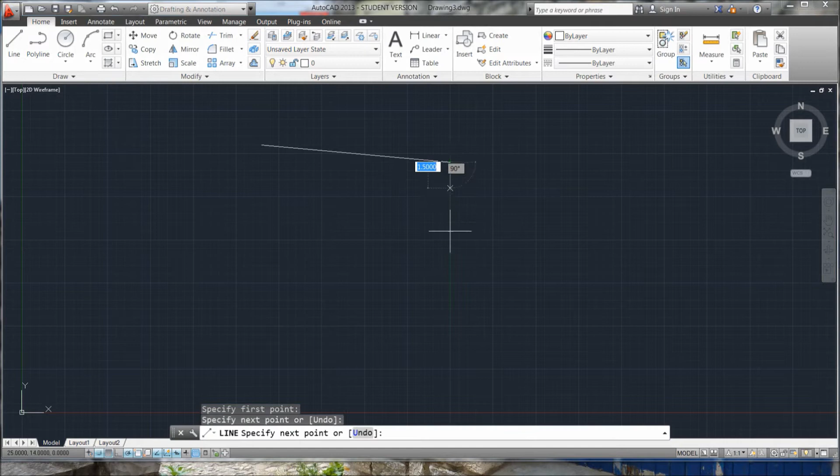The goal of my training is that with each tutorial you can improve your skills in AutoCAD. I want to go step by step and very slowly. Let's start. First, I show you how you can navigate in AutoCAD. I just draw something so you can see how it works. With your mouse wheel, you can zoom in or out. If you press the mouse wheel, you can move to the left, to the right, to the top and to the bottom.

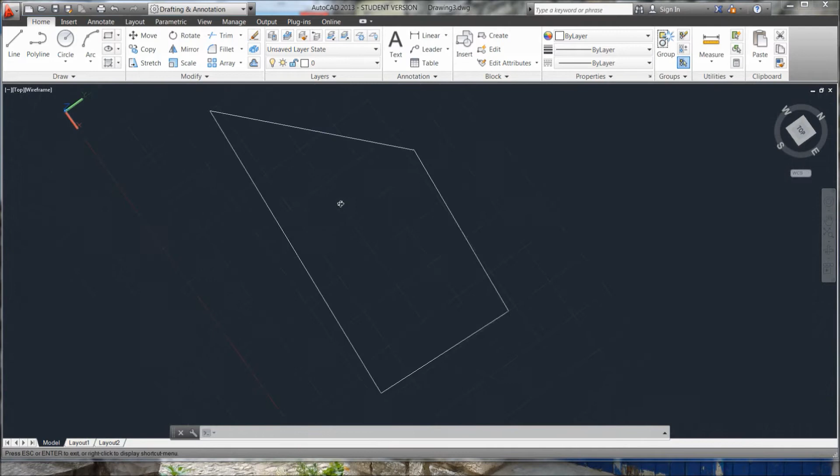If you hold Shift and press your mouse wheel and move your mouse, you can move wherever you want in the drawing. If you are somewhere in the drawing and you don't know where you are and you want to see your whole drawing, you can just double-click on your mouse wheel and you will see the whole drawing.

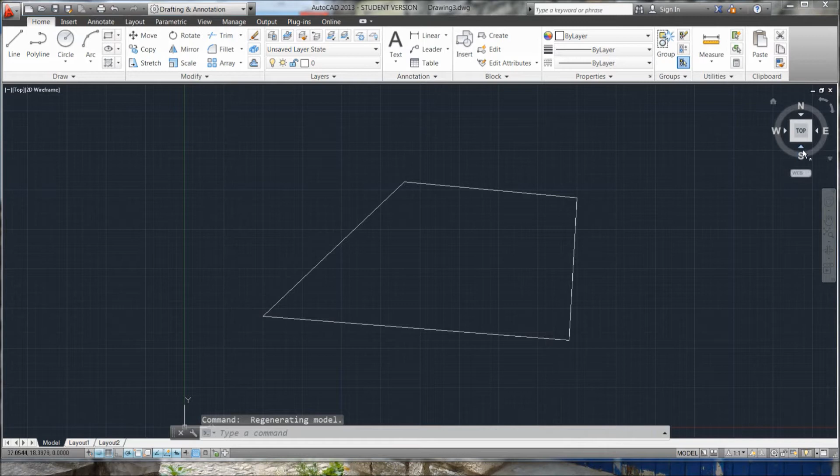On the top right, you have the View Cube. With this cube, you can also navigate in AutoCAD. When I turn, you see that the View Cube also turns with you. It always shows you where you are in your drawing. There's also a compass. You can also click on this. If you want to see your drawing from the top, you click on it. If you want to see your drawing from the front, you can click here. Or from the right side, you can click here. Or if you want to see it half right, half front, you can click between front and right.

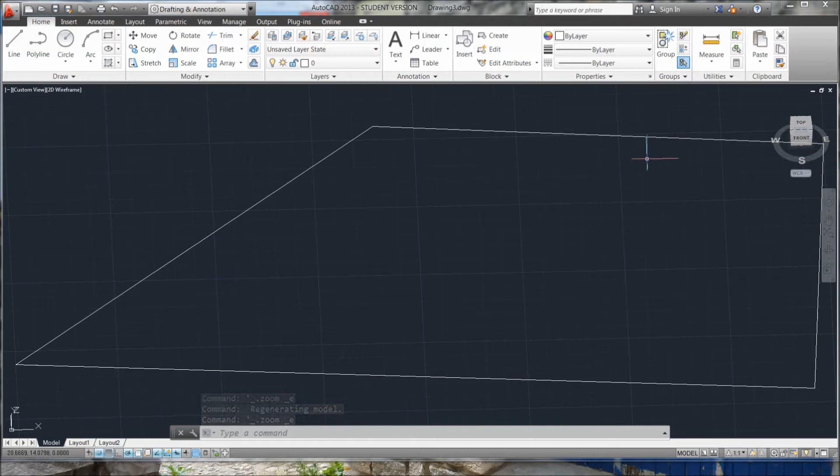One thing more, here you see the house or home symbol. If you have a favorite view, like maybe this, you can click this house symbol and set the current view as home. It means when you now go somewhere here and you want to go back to your favorite view, you can just click on the house symbol and it will go back to the view you set. You also have the possibility to make a perspective view.

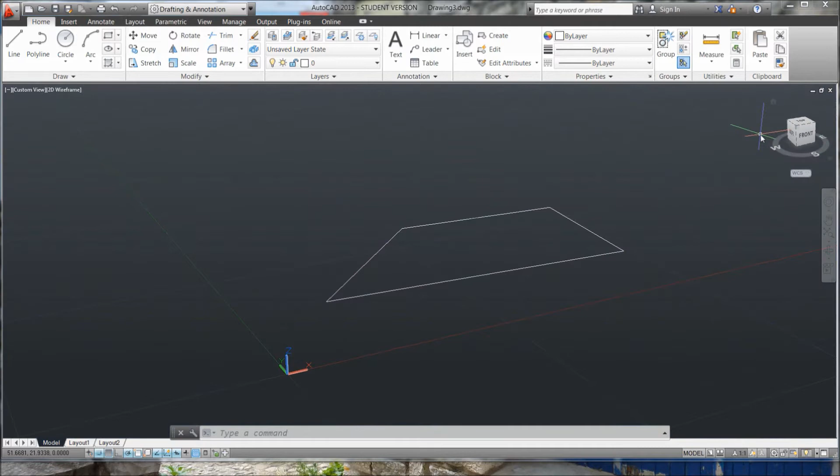Okay, and now I explain the coordinates. On the bottom left, you have the coordinates. You have the X coordinate, you have the Y coordinate, and when you press your mouse wheel and the Shift button, you also see the Z coordinate here. You need the Z coordinate for 3D drawings.

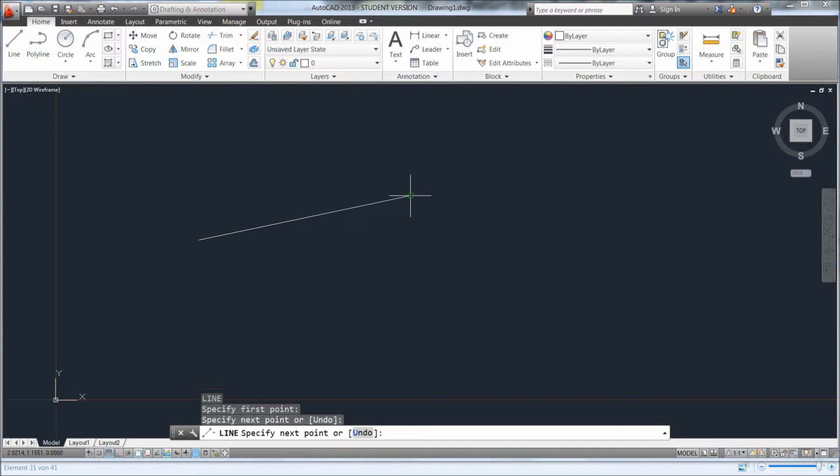Next step, I show you how you can draw a line. You can draw a line by pressing the button L for line and confirming with Enter or Space, and now you're able to draw lines. You can draw them anywhere, it doesn't matter. This is one possibility. Or you can click here on this symbol for line and do the same thing.

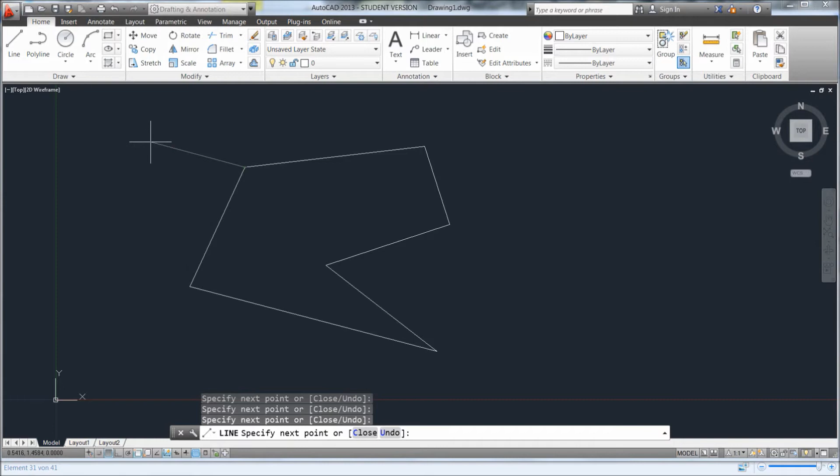Now you have another way, by using the coordinate system. There are two systems, the absolute system and the relative system. I will show you first the absolute system. Here is the origin point. The origin point is 0, 0, 0: 0 millimeters in X direction, 0 millimeters in Y direction, and 0 millimeters in Z direction.

Now I choose a line, and I have to specify the first point. I can do this by saying, okay, I want to go 100 millimeters: just type 100 in X direction, and I want to go also 100 millimeters in Y direction. If you press comma, you switch to the Y coordinate, and you can type again 100, and confirm with Enter or Space, and you set your first point here. See? This is now 100 millimeters in X direction and 100 millimeters in Y direction.

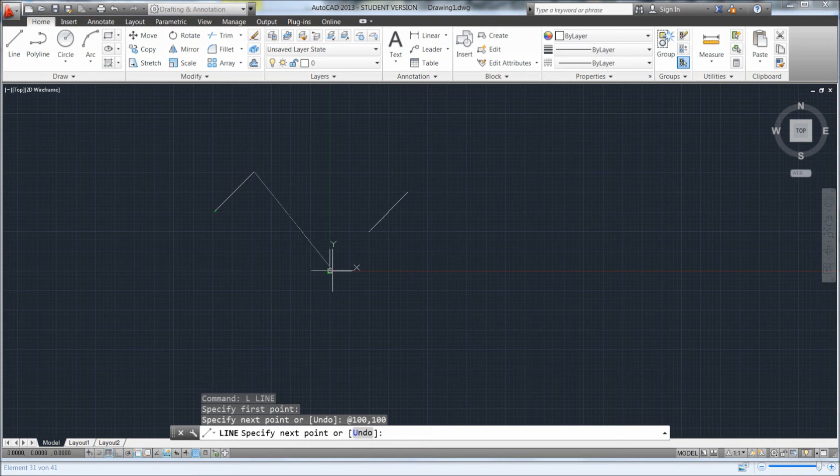When you want to do it in the relative system, you have to write, and you can activate it with the @ symbol. Again, the absolute system always starts from the origin point. You always have to think, okay, when I want to go here, how many millimeters I have to go in X direction and how many millimeters in Y direction.

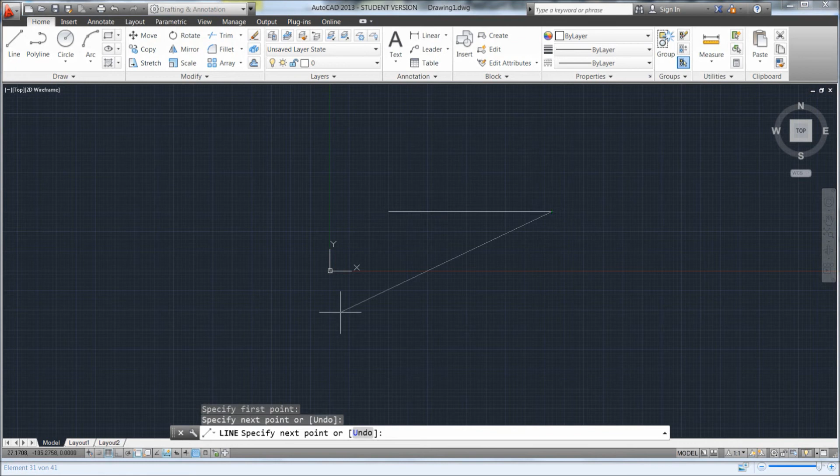So now, next step, I show you the angle. I choose the line and draw this line here. Now I want to go 45 degrees in this direction. You just enter the less-than symbol, and you say, okay, I want to go 45 degrees in this direction. And now you see that the line is fixed at 45 degrees. Now you just have to choose how long you want to go. I say, okay, I want to go 250 millimeters. Enter, and it automatically goes 250 millimeters in this direction.

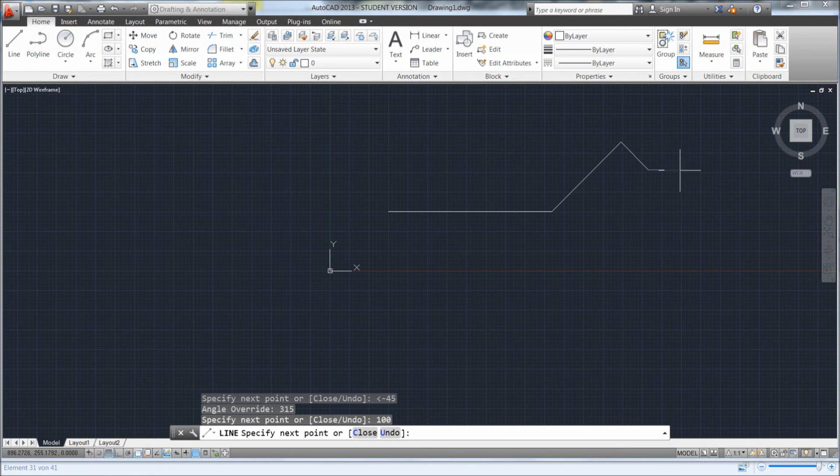Okay, now I want to go in this direction 45 degrees. You just say less-than minus 45 degrees, and you see, okay, it goes down 100 millimeters. So that's it actually. I show you one more thing.

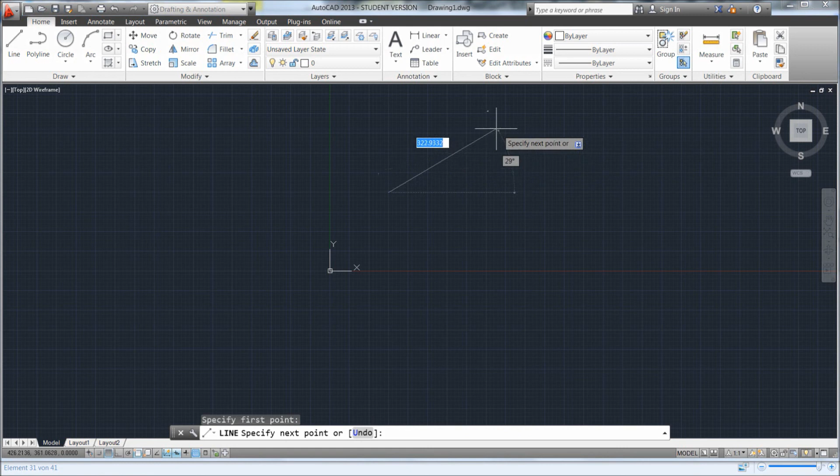You can also do the same thing if you activate the dynamic input here. It makes it easier to control your measurements. Now you see the description, what you can do and the measure, and we can switch from X to Y coordinate. So I click the first point here, and now you see it shows me the angle and the measures, and I can choose, okay, I want to go 500 millimeters here, and then with the Tab button you can switch to the angle, and you say, okay, I want 45 degrees: 500 millimeters, 45 degrees from the point.

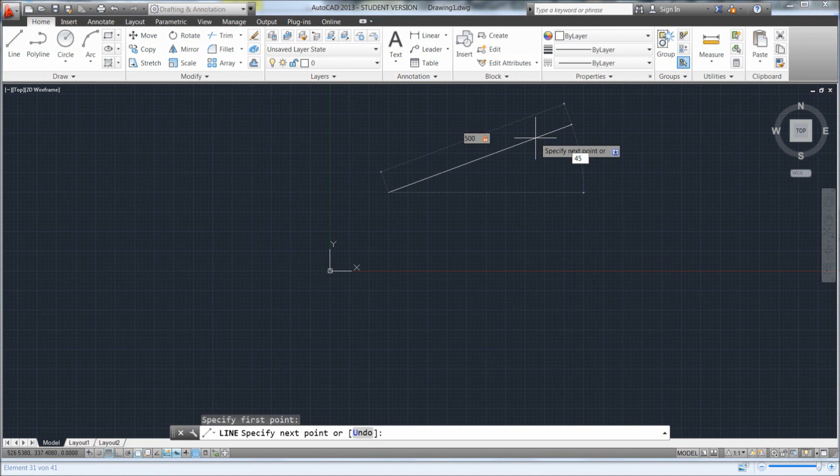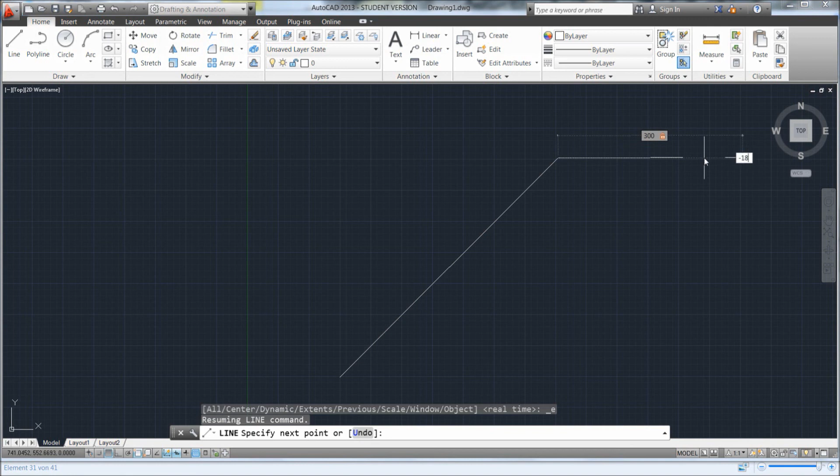You confirm with Enter, and we draw this line. Now I want to go 300 millimeters. With the Tab button you can switch to the angle, minus 180 degrees. You see it goes minus 180 degrees here.